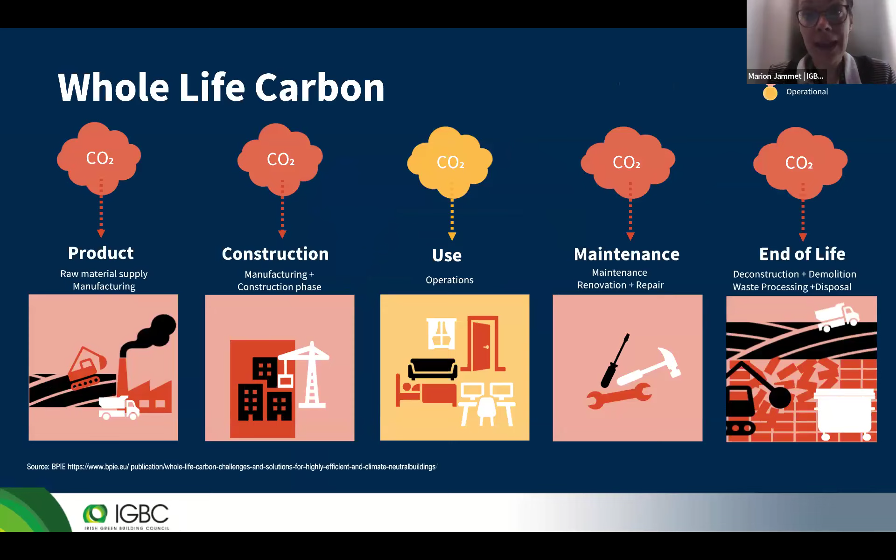As Ciarán mentioned, that's really the emissions associated with the extraction of raw materials, the production of construction products, the construction of buildings, and so on. When we did that study a few years ago to look at the full life cycle impact of buildings on our national emissions, we also tried to do some modeling and carbon projection. Obviously this is always challenging, but we commissioned that piece of study from a group of researchers from UCD.

So what I'm trying to say is that it's critical and fantastic that the EPBD, for the first time, looks not only at operational carbon emission but also at embodied carbon emission. What I'd like to do now is look at some of the articles that we see as key in relation to operational carbon, and then look more specifically at what is in the directive in relation to embodied carbon. I'll be quite short on operational carbon because other people today are going to cover that more.

But let's focus primarily on energy renovation, because that's really one of the biggest challenges. In the directive, you have provisions that relate to the macro level and then to the building level. At the macro level, all member states have to produce what is called a National Building Renovation Plan. This is going to replace what was previously called the long-term renovation strategy, but it's actually far more detailed than what we had in the previous version of the directive.

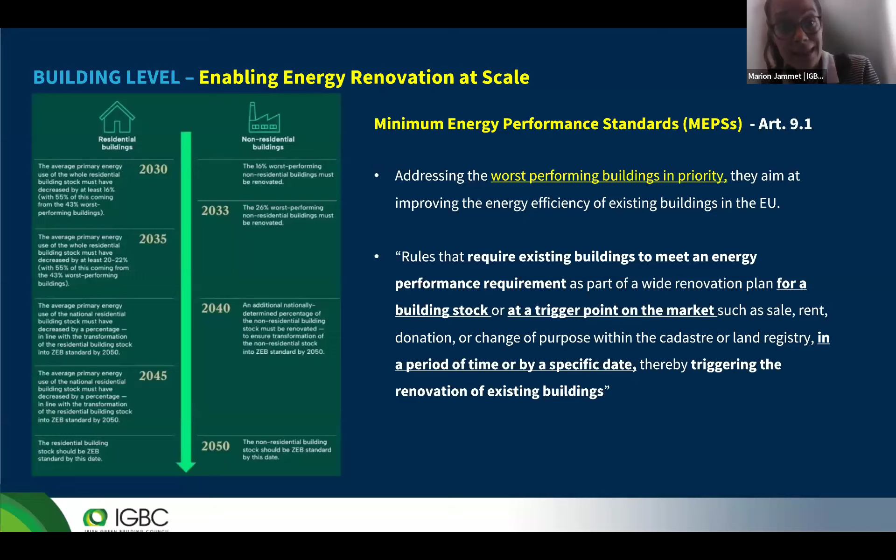We did a workshop on this topic last year in September to discuss it with the public sector and with industry, and you can find the findings of the workshop on our website. Hopefully the slides will be circulated afterwards.

What is in the text is that we need first to identify the 16 and 26% lowest performing buildings - that's a first step, based on data from 2020, most likely based on BER. Then by 2030, all buildings in this 16% batch must be improved, and by 2033, all buildings in the 26% batch must be improved.

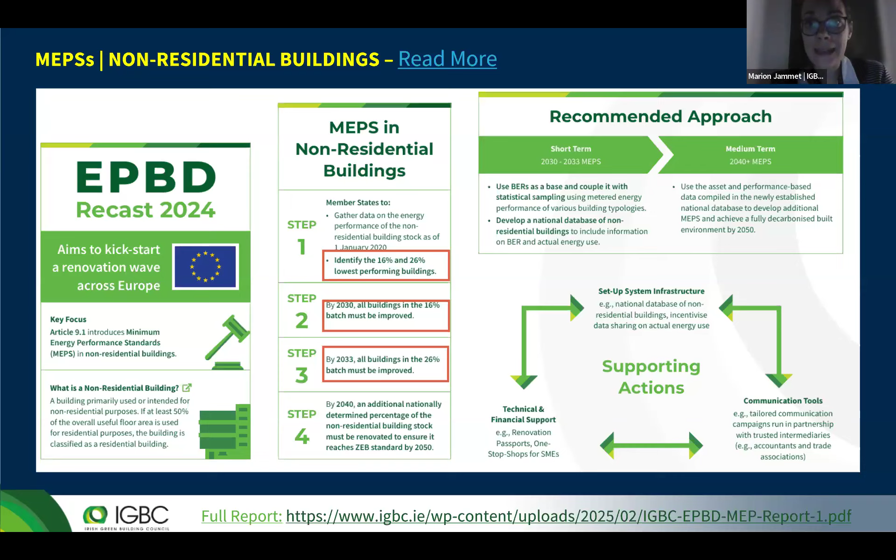Now, at the moment it hasn't been published, so we're not clear exactly what is going to happen. We suspect it's going to be based on the BER, which makes sense at the beginning because that's the only data we would have probably for 2020. But one thing we think is important is for the IGBC to also look more and more at actual performance of buildings, because ultimately what we want is to decarbonize our built environment. The BER is an asset rating, it's not based on performance. So that's clearly something we would like to look at in future.

Other interesting things at the building level when it comes to energy renovation: it's not only about regulation, telling you that you need to renovate this building by a certain date. You obviously need to include some support as well. There are a number of articles in the directive that provide that level of support, relating to financial incentives, making sure grants can be simplified or targeted, specifically targeting vulnerable households, people in energy poverty, looking at aggregation, but also looking at alternative sources of funding, such as low interest rate mortgages.

So all this discussion around the one-stop shop. This terminology is a bit confusing in an Irish context because we have a specific definition of one-stop shop. But what it really means in the directive is that it's an information hub, a physical place where you can go to get impartial advice on energy renovation. Again, there is a strong focus in that text in relation to vulnerable households, low-income households, or people in energy poverty.

The last interesting part is the renovation passport. The passport needs to be introduced by all member states, at least on a voluntary basis, by May 2026. The idea is to outline, in a few steps, how an existing building can be renovated to achieve the ZEB standard over time. I'd like to mention that the IGBC, with support from SEAI, is currently working on a pilot to develop a renovation passport for non-residential buildings. So please get in touch if you want more information.

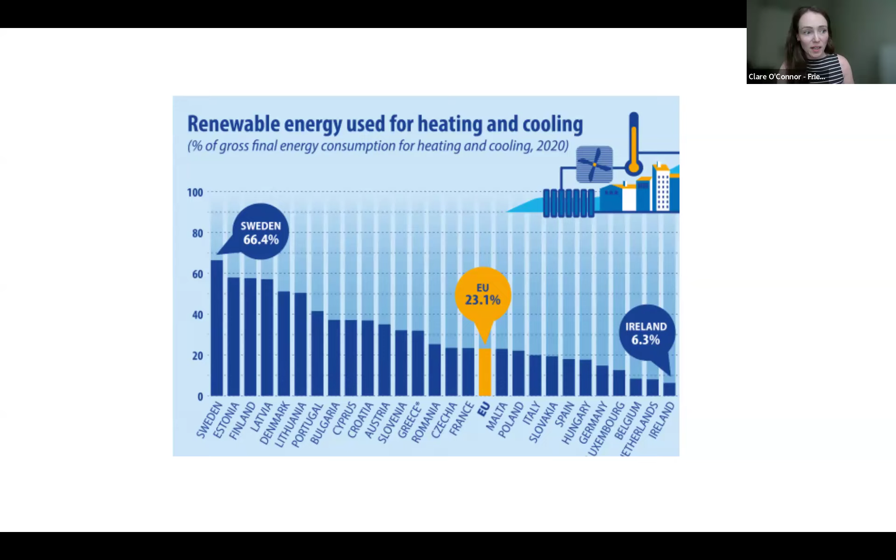I know I'm mainly talking about energy poverty here, but just to flag that we really are paddy last in Europe when it comes to renewable heating. We have the lowest levels of renewable heating of any EU country, so we're really lagging behind when it comes to decarbonisation of heat. I'll discuss that a little bit later, but we've a long way to go, and that can be addressed in our national building renovation plans and in the transposition of this directive.

Back at the end of March, we held a forum, Build Better Lives, where we brought together stakeholders to discuss transposing the Energy Performance of Buildings Directive. We brought tenants unions, members of the Roma community, the National Women's Council, as well as policy experts together to discuss how we can transpose the EPBD in a socially just way.

We got to hear people's real lived experiences, particularly people in social housing complexes who really feel like they've been left behind in these retrofitting schemes. What seems to be happening is that some councils are prioritising maybe easier to retrofit homes and aren't actually getting to the worst quality, worst performing homes. We had a tenant share that he was really struggling.

He had really bad respiratory illnesses, and his doctor had actually written a letter to the council requesting that their home be prioritised for retrofitting, but they really hadn't got anywhere with it, despite all the tenants coming together, setting up meetings with the council and not getting anywhere. So they were really disheartened as well.

So I think it's really important that when we're having these discussions, these are the people that we're really bringing to the fore, people who feel really disillusioned and not part of this transition at all.

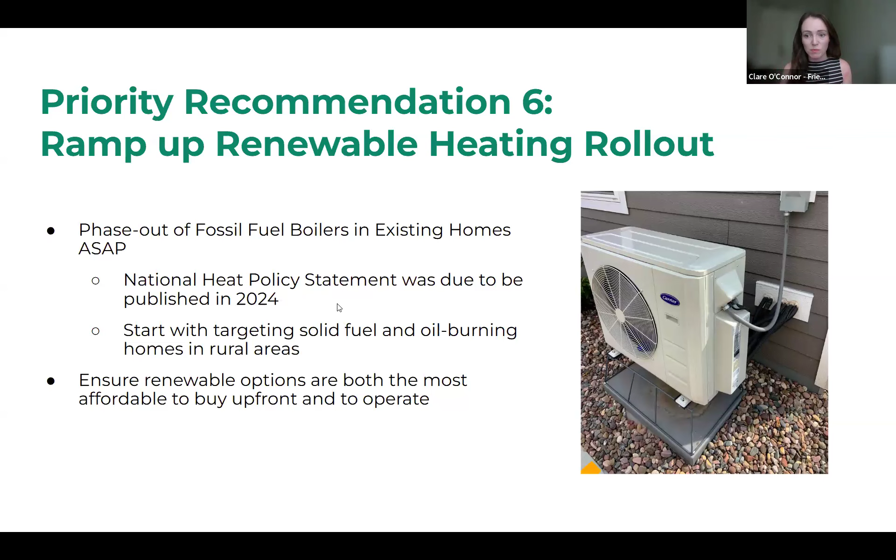As I said earlier, it really needs to target the solid fuel and oil burning households first, many of which are rural households. So there's a real opportunity there for a targeted rural retrofit scheme that targets those most polluting fuels first, and makes sure that renewable options are both the most affordable to buy upfront and to operate, so that people who get heat pumps aren't paying more than people who are on oil and gas.

That's a recap of my recommendations. I've probably gone over time, just shout if I have. So, here's kind of a recap.

As Marion said, there is an opportunity here to go beyond the minimum requirements needed in the EPBD. I know Ciarán, when he was negotiating the EPBD, had gone for more ambition, including minimum energy performance standards in the residential sector. I think that's a massive opportunity. I think it will bring a lot of people along who currently can't access retrofitting or the energy transition.

A plan to phase out fossil fuel heating is a big one. What will success look like? Warm, dry, healthy homes with less excess deaths, better health, lower bills, making sure renters are included and protected. They're already at the mercy of the housing crisis and really need to be prioritised as we address the climate crisis as well. Making sure everyone can access trusted and impartial advice to get going on their retrofit journey, decarbonising heat and energy, ending energy poverty for good, and green jobs with fair pay and training opportunities.

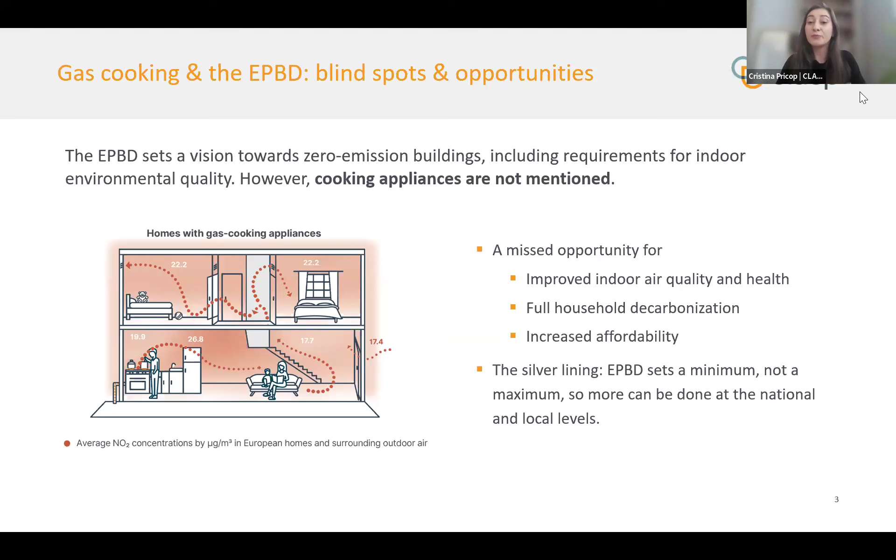This is a directive, so it sets a minimum and not a maximum, and there is more that can be done at the local and national levels. So to take a step back—gas cooking, why am I talking about it? Why am I focusing on it? It's because this is a public health risk. There are decades and decades of research that link gas cooker pollution to respiratory, cardiovascular, mental, and other health risks.

There are other vulnerable population groups as well, such as people who spend more time indoors, who could be the elderly or could be people living with chronic illnesses. In Ireland, around 30% of households still use gas alone or gas in combination with electricity in their kitchens, and research shows this is linked to an estimated 7,500 asthma cases per year that are due to cooking on gas.

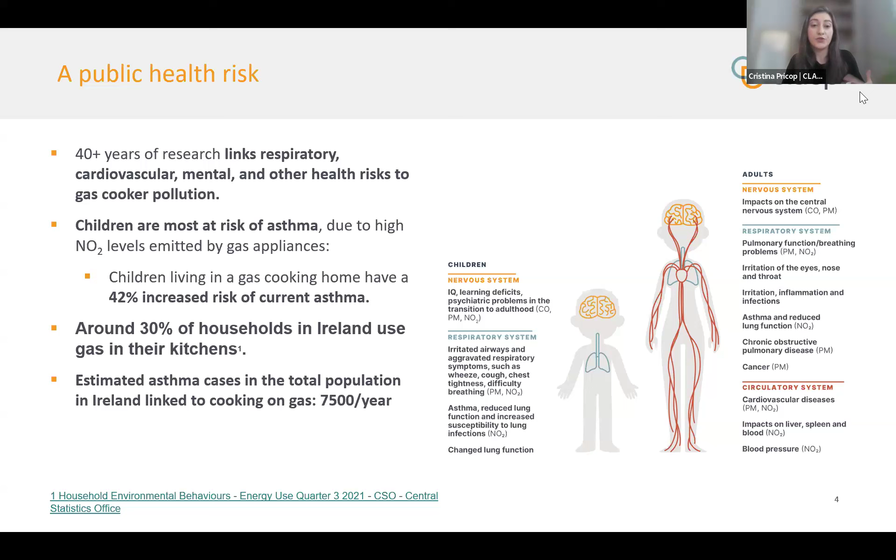So when CLASP started working on this, there was a lot of research out there, but where we thought we could contribute was in terms of specific and recent data from European households, because it is notoriously difficult to monitor air quality inside people's houses. So we ran a large data gathering project. We were in 7 European countries, over 250 households, and what we saw was that gas cooking households regularly exceed recommended levels of nitrogen dioxide.

We took as benchmark the World Health Organization guidelines—these are very science-backed health guidelines. We also looked at the European Union air quality standards, because there's legislation that regulates outdoor air quality, but not indoor air quality. In contrast, electric cooking households typically had a lower NO2 pollution level. We also considered cooker hoods, because sometimes they are presented as a solution to the gas cooking problem. Unfortunately, what we saw is that the presence of a cooker hood does not significantly impact air quality.

So we looked at different types of hoods, hoods that are ducted to the outside, recirculation hoods, and the impact that has on the air quality in different rooms of the house, and we did not see a major improvement. Now, ventilation is still very important, because when we cook, there is also particulate matter being emitted regardless of the technology that we use.

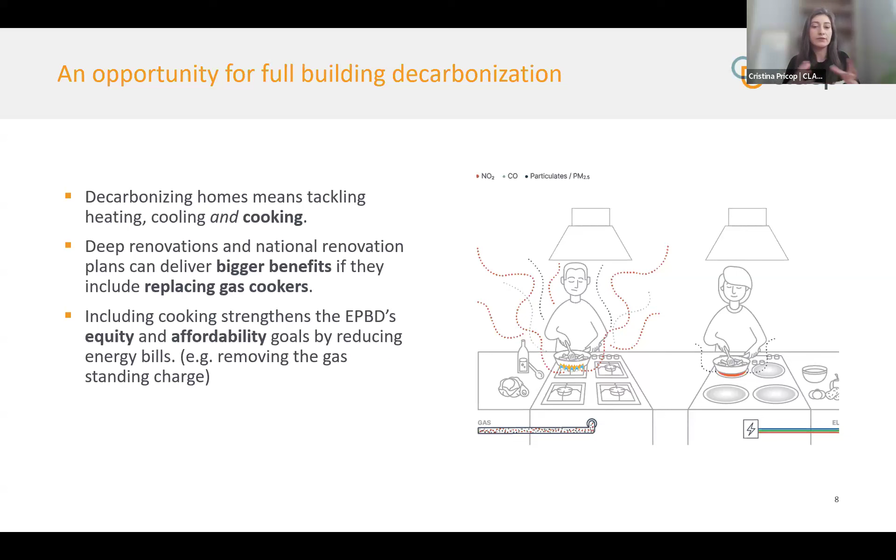And finally, policy recommendations. Indoor air quality and environmental quality metrics must include NO2 measures, because for better or for worse, what we don't measure doesn't exist. The benefits of electric cooking will not be visible unless we also measure NO2 levels.

And secondly, cooking must be included in tools like one-stop shops or national building renovation plans, as well as in financial instruments for renovation. And lastly, while the EPBD is a very important instrument, it is a big piece of legislation, we must consider a variety of policy pathways and measures, and those can include awareness-raising campaigns and labeling of appliances, as well as better energy efficiency testing.

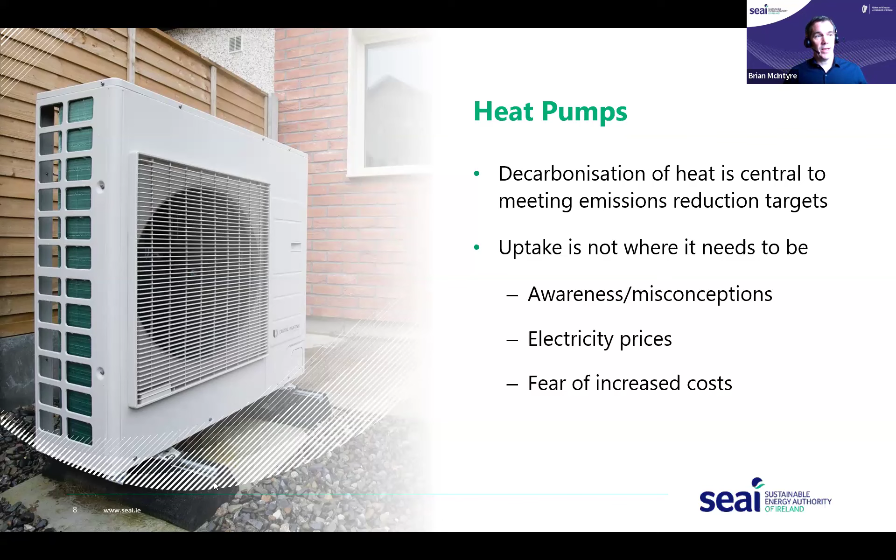So the financial argument isn't there at the minute, and we do need to look at that, because we've seen in countries where that ratio between gas and electricity is more favorable for electricity, there's been a higher deployment of heat pumps and a bigger uptake. People have this very real fear of increased costs, especially those in fuel poor homes. There's a concern that putting in a heat pump just means higher electricity bills, and that you're going to end up having to pay more to stay warm in your house. It has an impact on our warmer home scheme as well.

The other aspect is the building regulations. If you are undergoing a major renovation on a home, since Part L was brought in in 2019, if you are upgrading, say, 25% of the thermal envelope of a house - typically external or internal wall insulation would trigger a major renovation - that means you need to look at improving your roof insulation if it's below a certain level, and also upgrade the heating system if it's more than 15 years old and less than 86% efficient. And as of January this year, member states cannot provide financial incentives for fossil fuel boilers.

So what that means is that in a warmer homes scheme project, if work triggers a major renovation and a heating upgrade is needed, then SEAI can only install a heat pump. There are a lot of instances in houses where it's very difficult to get the heat loss down to a level suitable for a heat pump.

The reality is that a lot of people just don't want heat pumps. It maybe comes down to that fear of increased costs, and a lot of stuff gets peddled online. We put out a lot of information on our website, but I don't know if people go to the SEAI website before they go to social media to get information on heat pumps and how they work. So there has been that fear, and we've been met by a lot of people who say, I don't want to put in a heat pump.

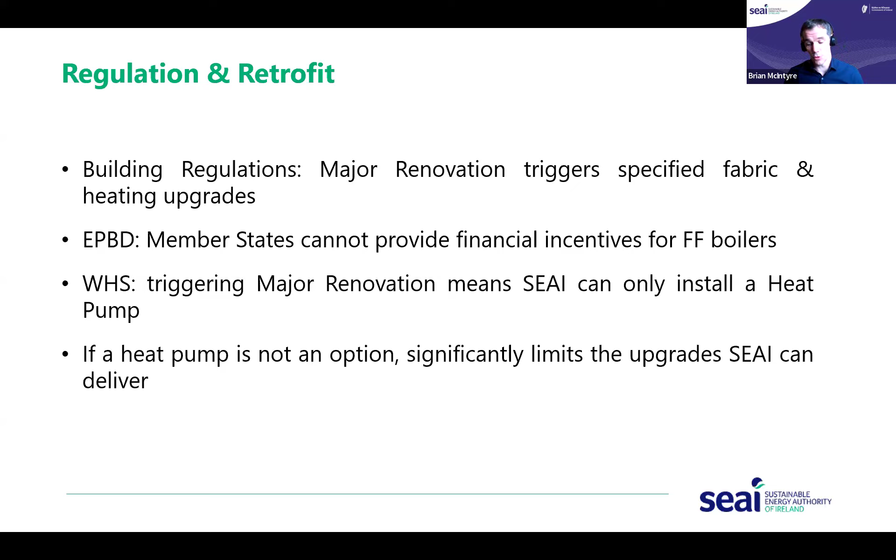If we're not in a position to put in a heat pump, then the work we can do is limited, because we can't be compliant with the building regulations if we're not upgrading the heating system. So it limits what we can actually do for that house, especially if you're not in a position to do cavity insulation, which wouldn't trigger a major renovation, or roof insulation.

The next step, in terms of fossil fuel phase out, is really welcome. I think we might not necessarily be in a position to have to wait until 2040. We are the authors of our own destiny here in that regard, but there is a need for a regulatory roadmap and what that means for retrofit.

While we do need to decarbonize our heating to meet our emissions targets, it also needs to really be fair, because a lot of people in poor housing are dependent on solid fuel heating, for example, or oil heating. It's very difficult to swap from someone who's possibly been provided a shed full of turf for a year from a family member, meaning they have zero or very little heating costs, and then putting in a heat pump can increase their costs. It just needs to be done fairly.

The last thing I'll say is, in terms of a lot of social housing and approved housing bodies, it's really important that there's buy-in from the people living in these homes. We've seen instances from some research we funded where, if homeowners or the people living in the house haven't bought into this retrofit journey, their experience can be negative, because they haven't been engaged.

It's really important that these people, whose homes are being retrofitted, feel like the retrofit is something that's being done for them, rather than something that's being done to them, because that buy-in is important and ultimately affects how that home performs. So that's it for me.